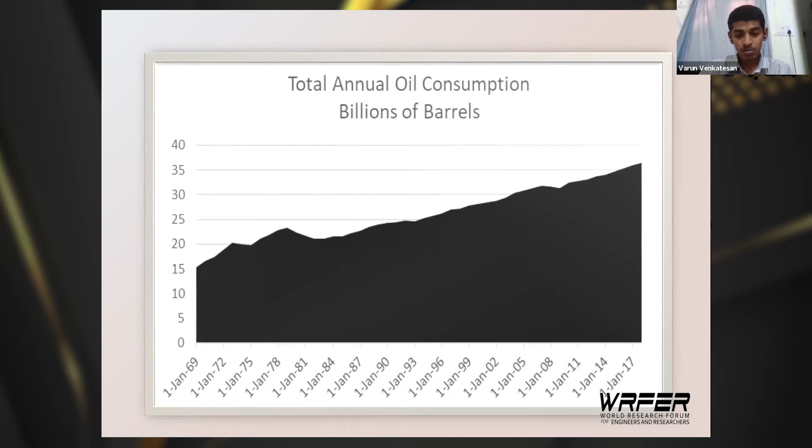In this study, we've chosen butanol and diethyl ether as the alternative fuels. Alternative fuels mainly have two objectives: they must be clean, giving very good emission results, and also be renewable.

When we come to butanol, it is an alcohol-based fuel. Alcohol-based fuels generally are very clean and have very good combustion properties, and the most widely used alcohol-based fuel in the market is ethanol. But ethanol has a very low calorific value compared to diesel, whereas butanol is an enhanced version of ethanol for use with diesel. It has a very high miscibility with diesel and also a very high calorific value compared to ethanol, and butanol has a high enthalpy of vaporization.

This helps absorb the heat in the engine cylinder, and when the heat is absorbed, the temperature in the cylinder during the combustion phase goes down, which causes the NOx emissions to go down as well. Butanol is also a renewable fuel because it can be synthesized from biomass feedstocks.

Next comes diethyl ether. Diethyl ether has a very high cetane number. Cetane number is an indication of a fuel's combustion properties; the higher the cetane number, the better it is as a fuel. It also has a high oxygen content, which ensures clean and complete combustion, and diethyl ether also has very less viscosity, which helps in easy injection of the fuel. Diethyl ether is also a renewable fuel; it is produced as a byproduct in the process of dehydration of ethanol to produce ethylene.

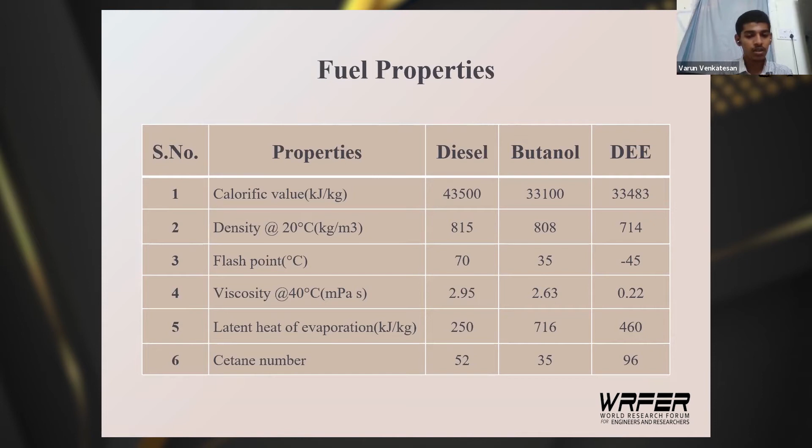Then comes exhaust gas recirculation, a simple, highly effective, and efficient strategy to reduce nitrogen oxide emissions. Its principle is the recirculation of exhaust gases from the exhaust manifold using a valve into the inlet manifold, so that the exhaust gases go into the cylinder and absorb the excess heat, thus reducing the NOx emissions.

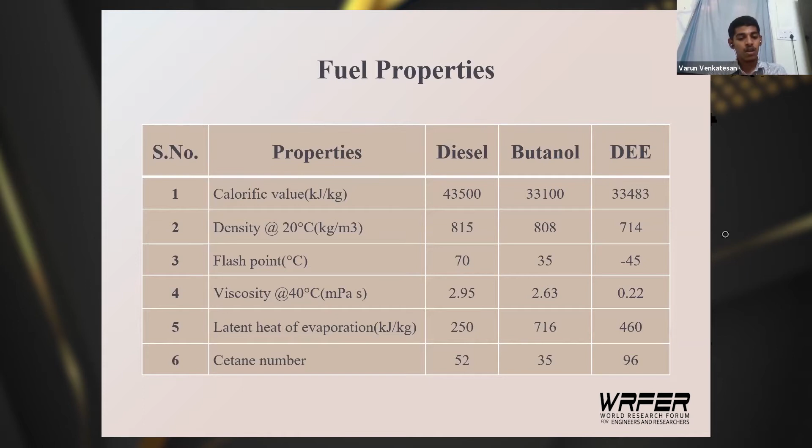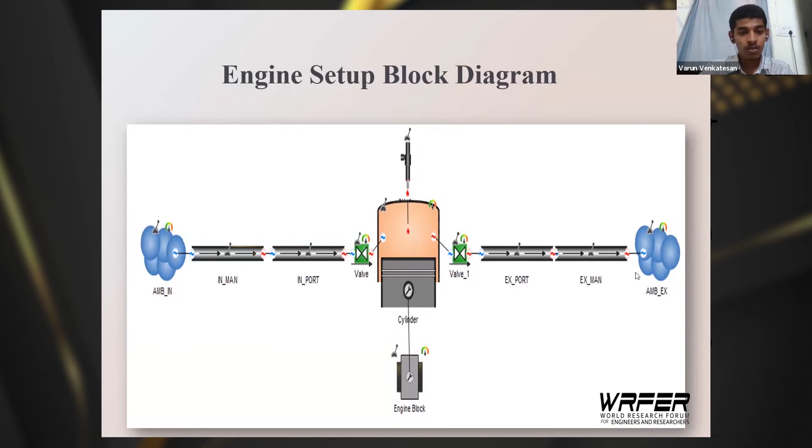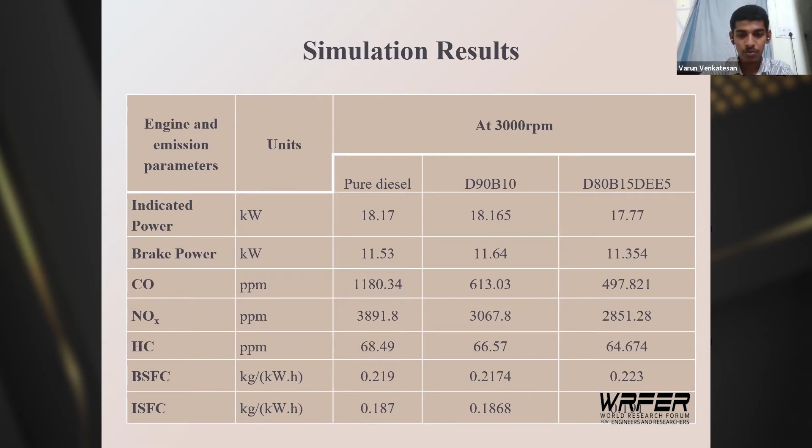These two test fuels were compared to pure diesel, and the measured properties are as shown: indicated power, brake power, specific fuel consumption, and carbon monoxide, NOx, and hydrocarbon emission levels. Brake power is the net power produced by the crankshaft after accounting for all losses, and specific fuel consumption is the amount of fuel consumed for every kilowatt hour of energy produced by an engine.

It is found from the results that carbon monoxide emissions have gone down by around 55% in the D80 B15 DEE5 blend, NOx emissions have gone down by around 25%, and hydrocarbon emissions have gone down by 5%. It is also seen that the variation in performance characteristics like brake power and fuel consumption is less than 3% for all the cases here.

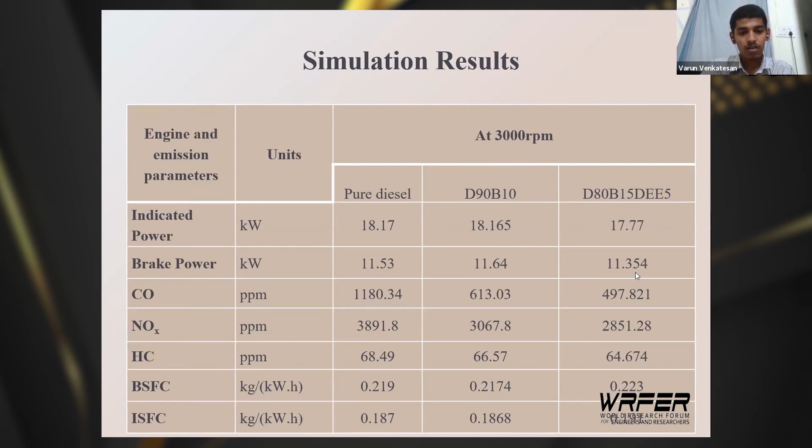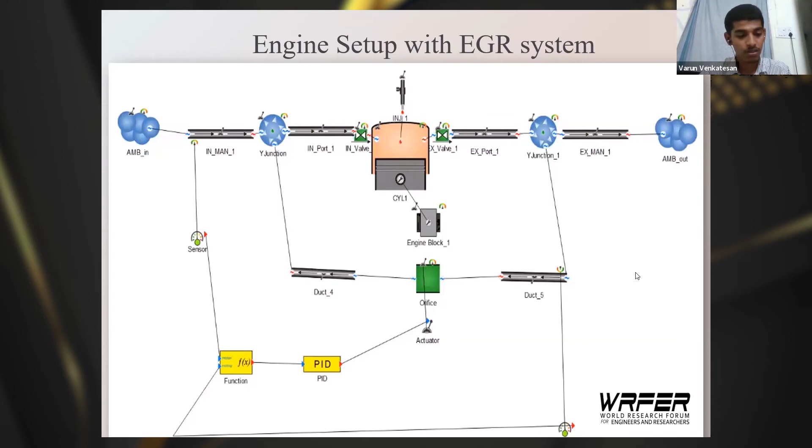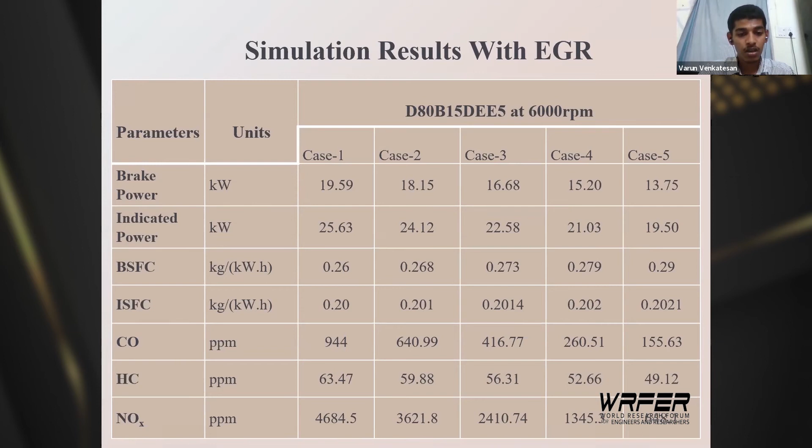This table shows the results for the second simulation, done for the D80 B15 DEE5 blend at 6000 rpm. There are five cases: from case 1 to case 5, the EGR recirculation rate goes from 0 to 20%, with an increment of 5% at each case. It is found from the simulation results that carbon monoxide emissions have gone down by 83%, hydrocarbon by 22%, and NOx by around 85%. But there is also a significant decrease in brake power, which is not favorable. So EGR must be limited to around 10 to 15%.

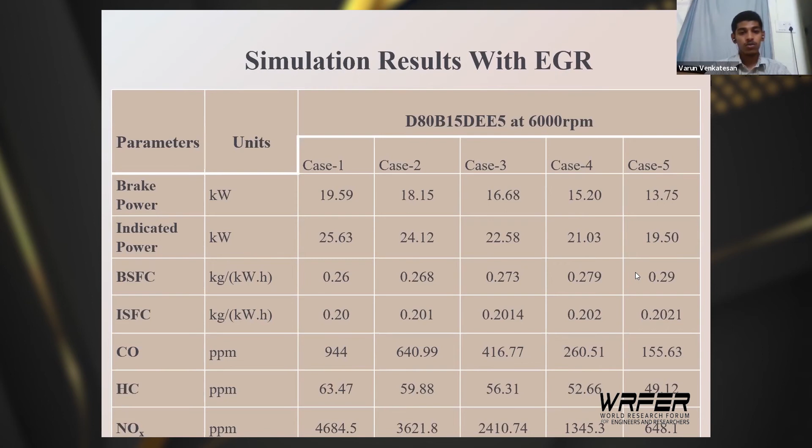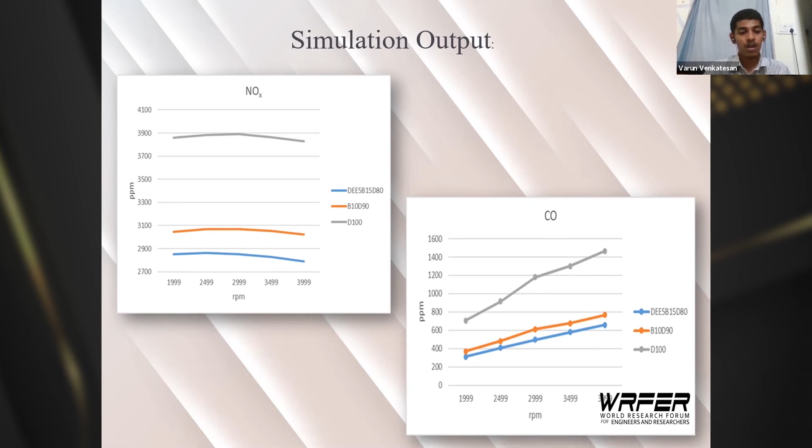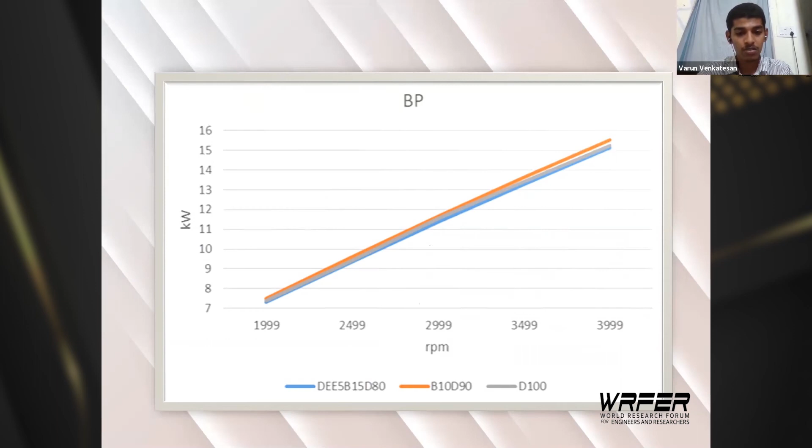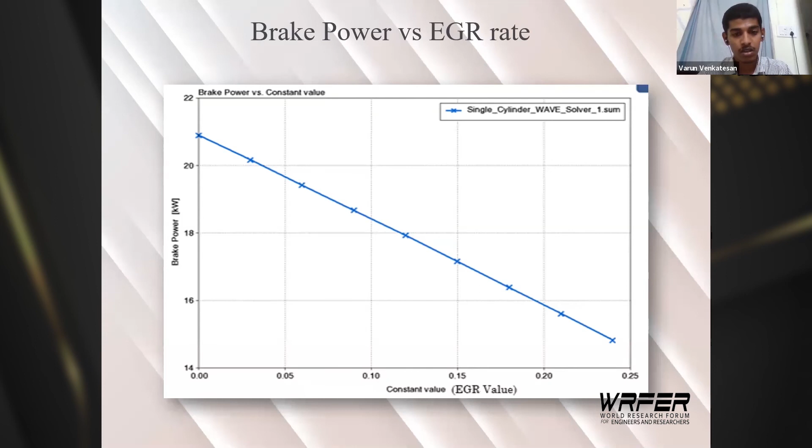This graph here shows very little change in performance, the brake power, for all three blends. This is favorable because there is no compromise in performance, whereas the emissions have gone down. And this shows the linear decrease in brake power with increase in recirculation rate, causing a trade-off between the emissions and the brake power. So EGR recirculation rate must be limited to around 10 to 15%, as I already said.

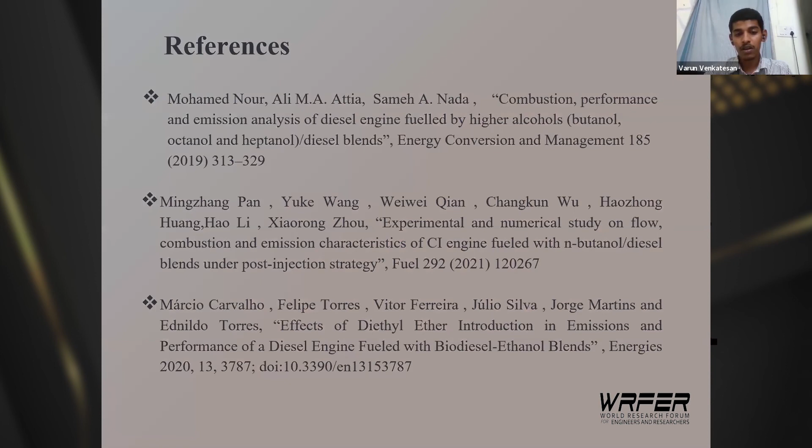So, in conclusion, I would say that the DEE 5%, biodiesel 15%, diesel 80% blend has produced very promising results, and its use as an automotive fuel is very much feasible. On a broader sense, for the problem of harmful emissions and the depletion of crude oil, electric vehicles are no doubt the best solution in the long term. But the transition to EVs is a very slow process, mainly in developing countries like India and other underdeveloped countries. The infrastructure required for EVs, like charging stations, will take a lot of time to be set up.

For now, in the current scenario, a majority of cars sold in India cost less than 10 lakh rupees, and in the current market there is not a single electric vehicle that costs less than 10 lakhs. There are also hybrid vehicles available, but the cheapest hybrid vehicle in the Indian market costs 20 lakh rupees. So we cannot wait for the advent of electric vehicles by continuing with the same emission levels and diesel consumption. Blends like these and alternative fuel use can help in the transition from conventional IC engine run vehicles to electric vehicles.

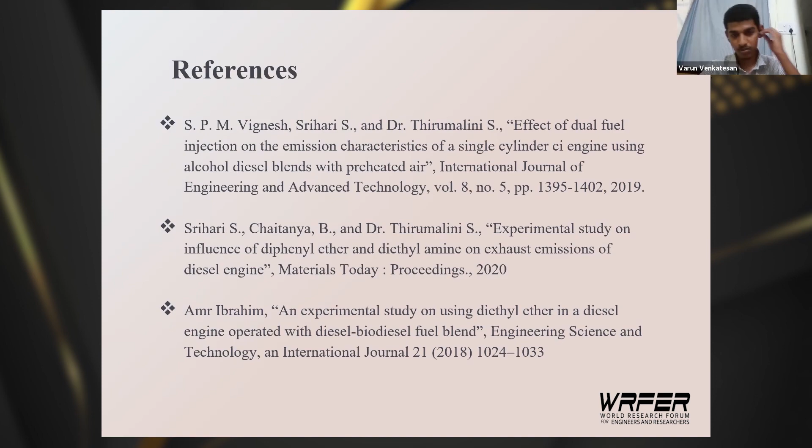So this is my presentation. Thank you.